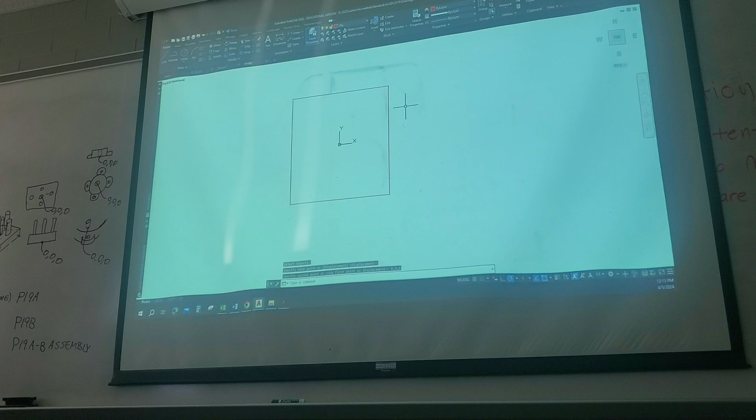So a lot of my 3D drafting, sometimes I start exactly where it needs to be. A lot of times what I do is start drawing, and then at some point I need to adhere to 0, 0 - sometimes it's after I've finished drawing the part that I say okay, this is where I need to position it. So it's up to you how you start out.

Like I said, when you do 3D projects, there's very likely multiple ways of doing it. Alright, so there's the outside of my box, C and space bar. I'm gonna go to 0, 0, 0 with the circle. It has a radius of 0.5.

I'm going to copy it, go straight up. I do not have a dimension there, do I? Let me check that - I don't have a dimension out to those holes, so let me see what I've got on that.

So make note of this - oh, there it was over here on this other page though. So technically it was on there, but alright, going back to it.

I'm going to copy this object straight up 2 5/8, straight to the left, 2 5/8 straight down, straight over.

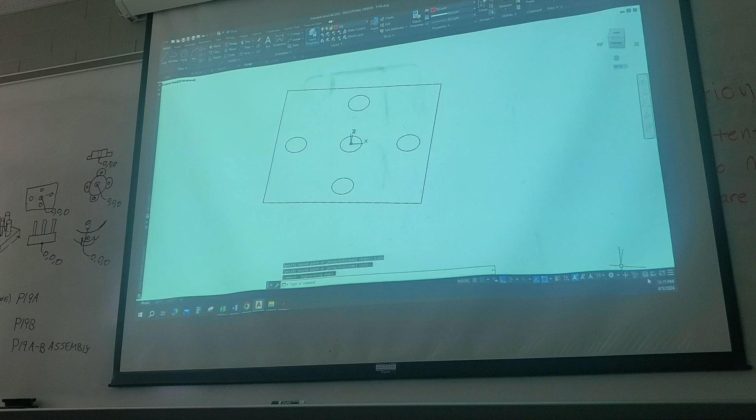And then I can go into my press pull command, which I don't have my 3D ribbon turned on, so I go into my press pull. I tell AutoCAD to - actually I can just do extrude, probably be easier for this part - extrude these cylinders

a height of 2 inches. Extrude this rectangle a height of 0.5.

That didn't work, did it? Alright, let me try it again.

Extrude circles, a height of 2 inches. It's still in 3D. I think extrude just makes it like a shell, because extrude was messing with mine too when I was trying to do last week's assignment.

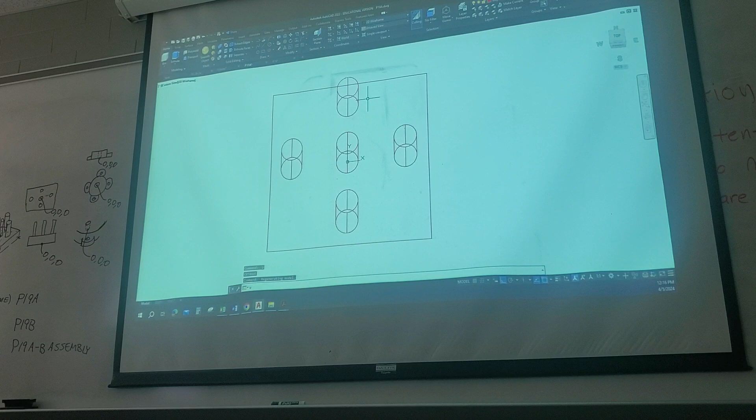You have to join everything. I'm just trying to get back out of it. Alright, there we go. Alright, so now we're back to 2D.

I'm gonna go back to my 3D. Now I think I did too much inside that extrude command, so I'm gonna select the circles. I think it was still in the extrude command when I picked the rectangle.

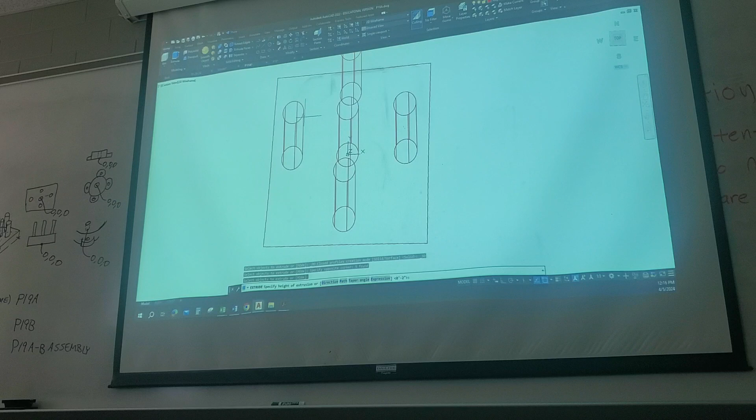I'm gonna tell it to extrude these a height of 2 inches, and then space bar back in, extrude this a height of 0.5. So there that is. The beauty of extrude versus press pull is with extrude, there are no 2D shapes left over. It does incorporate the 2D shape into the final product.

So there is Control S, there's my P19A. I'm gonna go ahead and stay where I'm at, do a P19B. You can see when I erase that one solid, there's nothing left over.

Alright, so there's my 0, 0. For the second one, I'm gonna go circle, 0, 0, center. And that one is, so the small ones are 0.5 radius. Then I've got another one that's at 0, 0, that is 2-inch radius.

I've got these 0.5 ones. I've got one of them straight up, 2 5/8. One of them to the left. If I still had my profile, I could have used it. One of them straight down, and one of them to the right. And then I've got another circle out here on each one of these that is 1-inch radius.

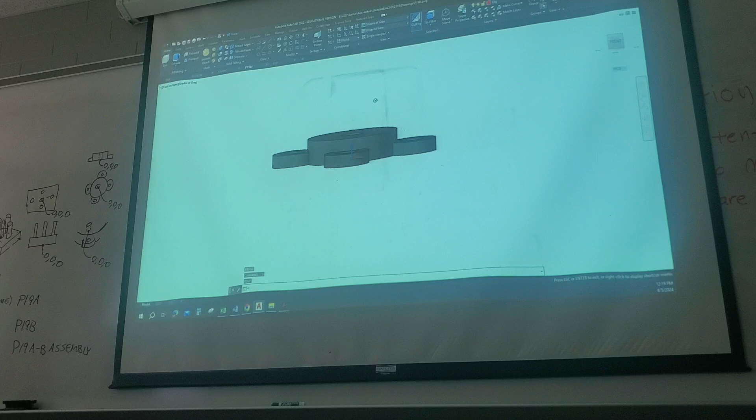Another way I could have done that was to roll that object up, look at it from this position, do a regular window just across the bottom, and then erase those 2D objects that way. So that's my P19B. Any questions about that one?

Like I said, pretty basic 3D shapes, but multiple ways of drawing. You could have drawn both of them with 3D objects, cylinders, and then box on the first one.

So now what I can do is I can go Control-Shift-C, 0, 0, 0 for my base point, this object right here to my clipboard. Now I can go back to P19A, which I just closed down, or did a save as, is this one.

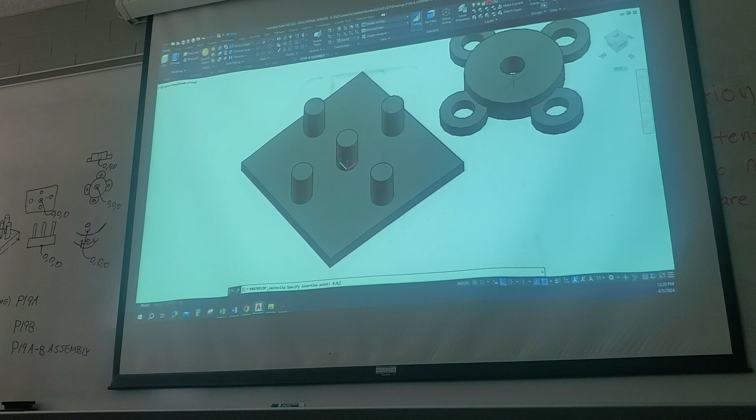I can come over here, do my save as, call it P19A-B assembly. I can do Control V, 0, 0, 0.5 and enter, because I want to move it up half an inch in the Z direction. Now I've got that one sitting on there.

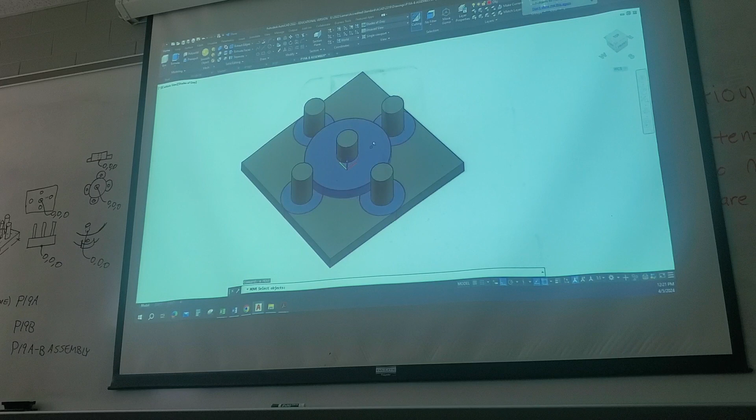Had I just went and said Control Shift V, 0, 0, 0, it would have been down there too low. I could have then went move, selected that object, moved it straight up in the Z direction, 0.5 and enter. Either way, it still needs to be sitting on top of that object, not down into it.

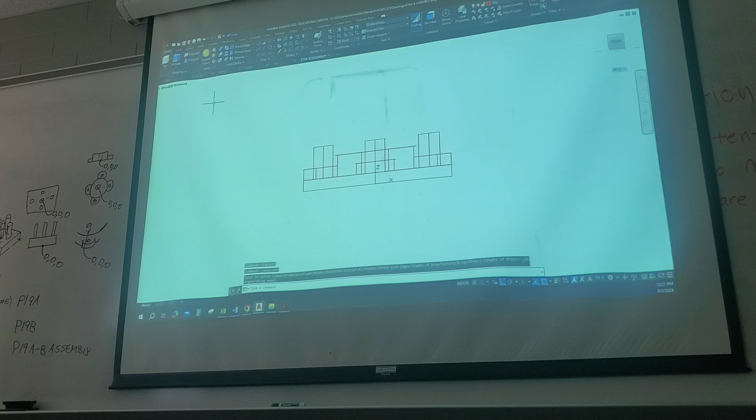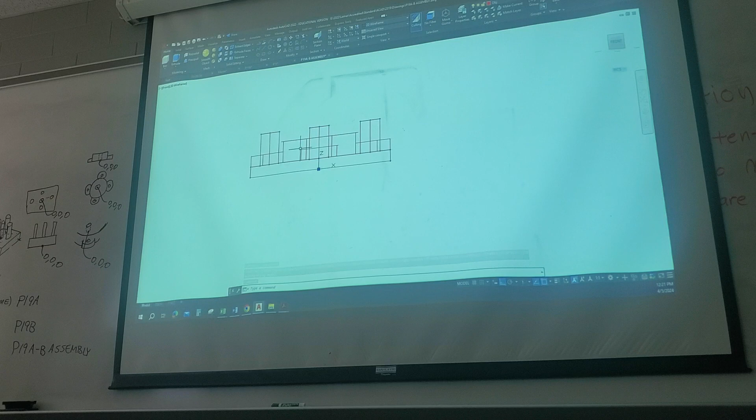So if I go to wireframe, which is how I can go to check that, I can see that that top shape does not go down into that other shape. Any questions on this piece?

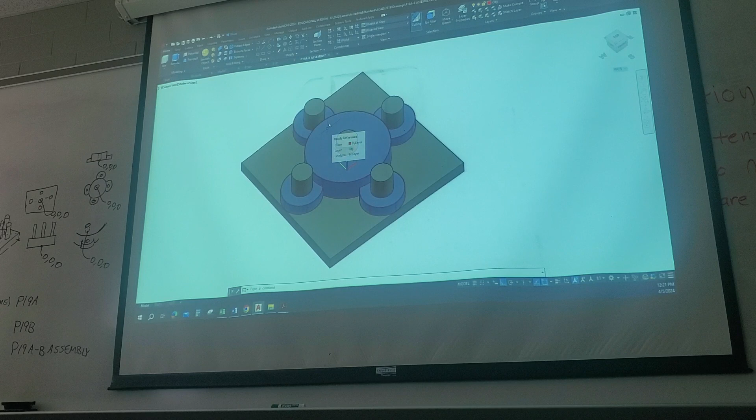Alright, like I said, that's simple, but I want y'all to spend some time playing in 3D. Here is a little visual of your next thing that we're gonna do. So you're not doing it on this project, but I want to show y'all so that you can kind of practice it a little bit.

You're more than welcome to, but remember, all you're turning in on this one is the 3D part. That's all I'm checking on this one. I'm not checking anything 2D. But on your next project that we're gonna do next week, you're gonna have a test next week. I'm gonna give you your next project and give you a little bit of instruction on it, and then you'll start your drawing test.

So what you're gonna do next week on your project, starting next week on your 3D projects, is then turn it into a 2D project. So this assignment would actually get emailed electronically because it's a 3D check, and then you would also have a printed copy. So everybody ready?

Watch to see what I do to take this into a printed version. All right, so whenever we drew this, we took what I gave you that we assumed, or we took that to be the top view, which it was.

So when I come over here on my view cube, remember we always need to have your WCS set right there, your world coordinate system. That is AutoCAD's coordinate system, 0,0 in its real natural position. That's what 0,0,0 you need to be basing your drawing on, with WCS set right there.

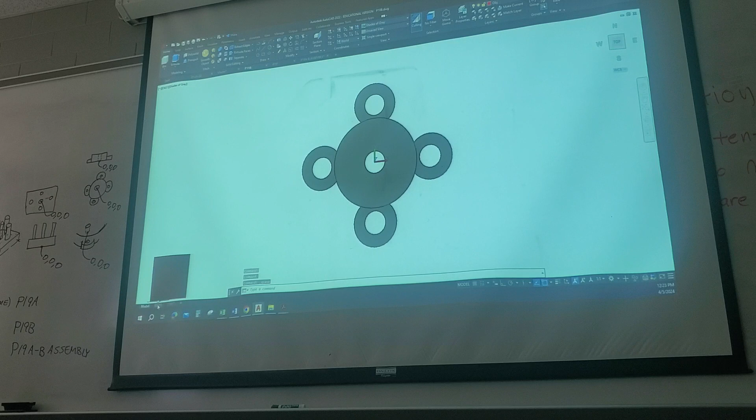I want to do 2 views, and that's it. Now I have 2 views in an ISO. So after I've drawn my part, we're still doing like we did off the sheet before. Control S to save my drawing was my next step. Next step was to select the border and title block, which this one is 8.5 by 11.

Here's where it differs with a 3D project. So what I'm gonna do is I'm going to erase my viewport. Remember that, erase your viewport.

We're no longer looking through that window at something in model space. We're gonna be doing everything that we need to do right here on this page.

You can switch layers if you want to. I usually stay in my main object layer. There are different things that you can set up layer-wise inside the base command.

So what the base command does is it takes that 3D object that you've drawn and shows it in a 2D view. So when I select the base command, it expands. I've got 2 options, from model space, from inventor.

So if you're creating a 2D drawing and you're using Inventor, you can use your AutoCAD and your AutoCAD borders to put that object onto.

So I come down here, I tell AutoCAD from model space, I'm going from AutoCAD's model space is where I'm pulling that 3D object, that 3D shape. So I say from model space, AutoCAD says, okay, this is the object that I found in model space.

The standard view that comes in whenever you click that is going to be your front view. So before I left model space a while ago, I told y'all and showed y'all that based on the view cube, the top view was looking down on it.

So had we went over to our view cube and rolled it up to our view cube said front, this is the view that we would have been looking at of that object.

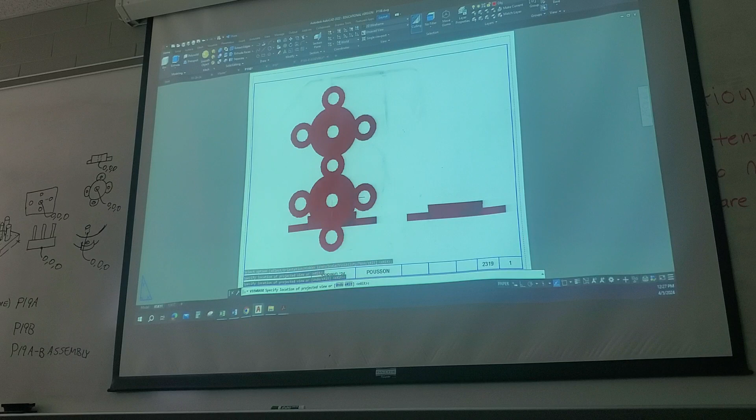So we can do any of our orthographic views just by dragging our cursor in that direction. I can do a bottom view, a top view, right side, left side. I could even spin it around and do a back side, but it would be off in space, I guess. But you can also do isometrics.

So I can bring my cursor up here to the corner where we normally do our isometrics. You can see that that view doesn't change based on my angle over here. It's going to be that isometric in any of these off vertical or horizontal directions, bottom side of it down here, top side of it with these. So I'm gonna pull it over here for this isometric, this ISO right here, and pick that point. That's all the views I want, so I'm gonna go ahead and hit enter to complete my command.

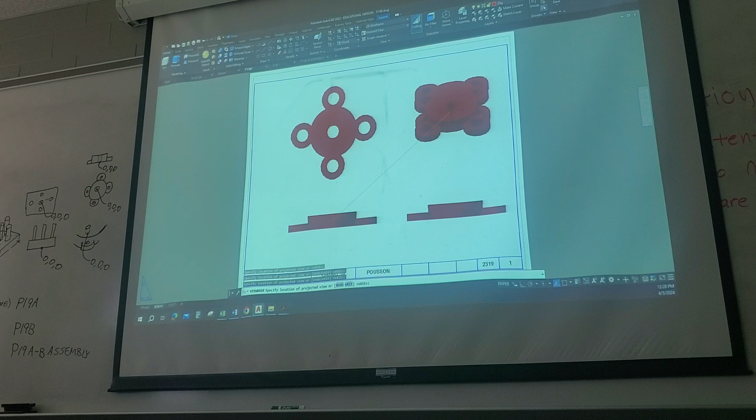There is my 3D object in a 2D format. You can see that these two views look just alike, so I did not need that view. I can erase it very simply, just by clicking on it, picking E and spacebar.

So here's the next thing you're gonna need to do. This view up here, the isometric view, we do not show hidden lines in an ISO view. So you're gonna need to move your cursor up there. You can see that view's lighting up. It is not a 3D object, it's a 2D projection of a 3D object. So if I single click on it, you can see some stuff lights up right here. You can see my ribbon changed. I've now got this drawing view tab because I selected that object that AutoCAD added to my ribbon up here.

What I'm gonna do is pick edit view. You can see my menu changed a little bit again. I'm gonna select right here where it says hidden lines. I'm gonna expand this, and you can see you can click and pick different visual styles to show here. What we want with our isometric view is visible lines only. So when I click visible lines and hit escape, you can see that now that view fits our criteria.

So the next thing I've got to do is put some dimensions on here. Just mimic the dimensions that you see on your page. So I go into my dimension layer. I don't have to worry about, oh, what layer is this in? If you come down here, you can change the layer and scale. We don't have to worry about scale when we do this.

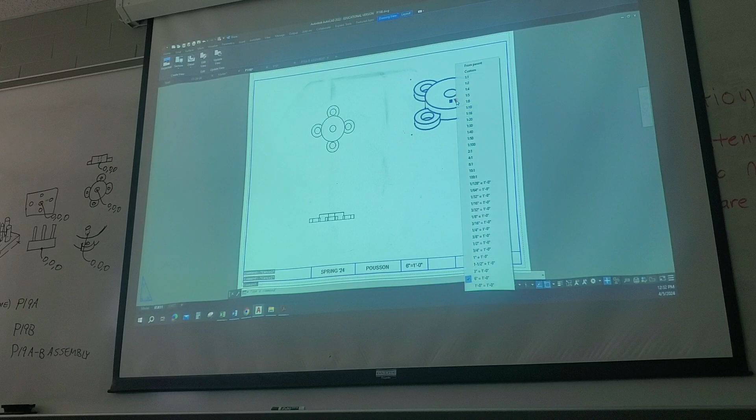Or I can set it back to by parent, and then whatever I do on that main view over there is what scale will drive it. So we said that 6 inches equals a foot is our best scale.

Now to dimension it, I've gone into my dimension layer. I'm gonna zoom in on this view. I go into my annotate tab. I've got my 3D on, my linear dimension. So on my drawing, it shows a dimension from here to here. Didn't have to worry about scaling because there is no viewport.

I've got some diameter dimensions to show. Got a diameter of this shape right here. I need to pull that to the outside, don't forget to do that. I've got a diameter of this guy right here. I already got that, this one right here.

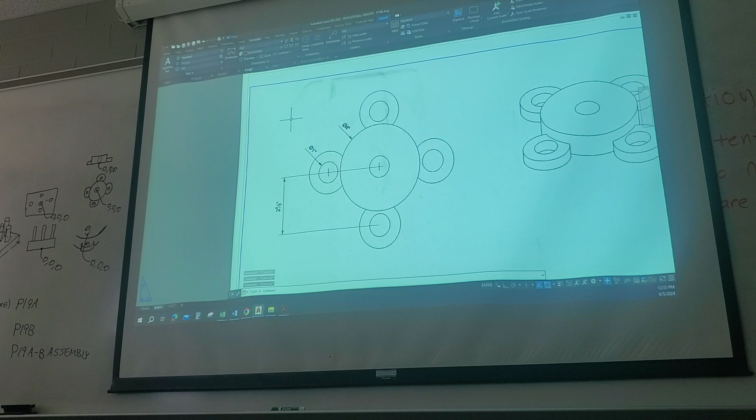Now there is technically a mistake on this, but we're okay with it in this situation. Before I tell y'all what it is, does anybody see anything with the dimensioning on this object? Anything incorrect? I'm gonna go ahead and put this other dimension on there and y'all can look at it and see if y'all see it. But like I said, we're okay with it in this scenario.

Need to add the typical of this.

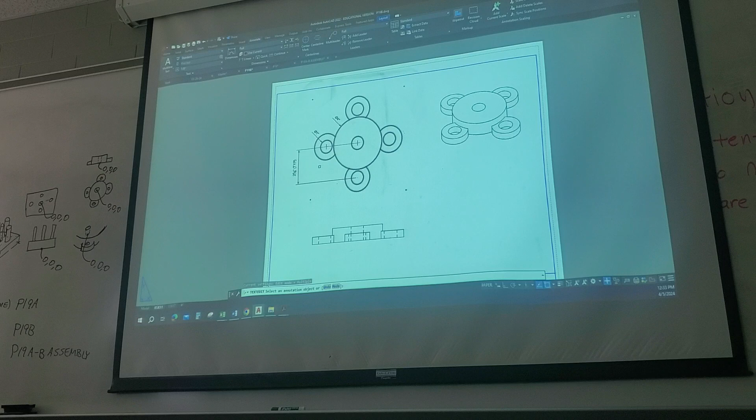Does anybody see what the incorrect dimension is, other than the lowercase letters out there? The incorrect measurement on this, or the incorrect information on this, is that right around in this area, on this outside ring of that small circle right there, they call that out as a 2-inch diameter. Does everybody see that? Mm-hmm.

Technically, that is an arc, not a circle. An arc is dimensioned with a radius. The reason we're okay with it on this is because it was represented and drawn with a diameter shape. There is a full diameter, it just goes up inside that other one right there. So technically we're okay with that being shown as a diameter dimension, but normally with that being an arc, it would have been defined with a radius, not a diameter.

All right, so on those dimensions, you don't have to put all the typicals.

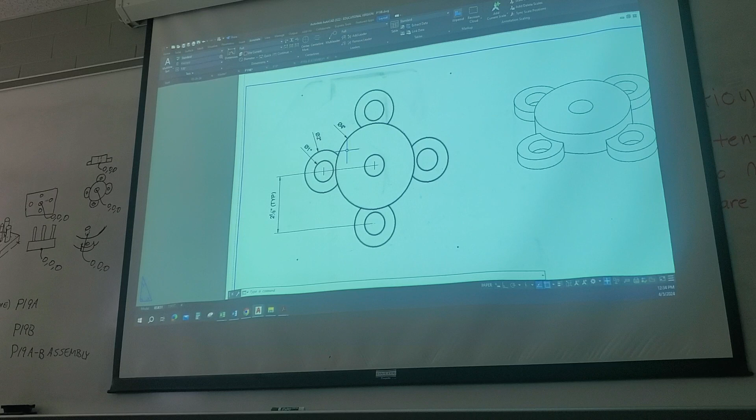Definitely do not put all that 0.5 inch thick stuff. That applies for you to be able to draw it. This is the dimensioning information, and then we're gonna come down in this view because we have to show dimensions in every view. I'm gonna show that thickness dimension down here. So that piece is that bit thick, this piece is this thick.

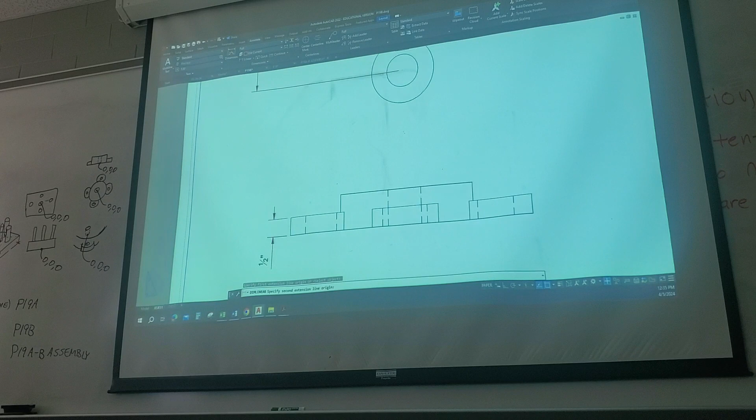See that little yellow box right there? Let me do that dimension again. Whenever I come over here into my dim linear command and AutoCAD says pick a point, if I come down here and pick an end point or some physical point on that 3D shape, AutoCAD's okay with that. If I come over here and pick that node, see that little tooltip that says node? That means it's reading that dimension, not the 3D object, and AutoCAD is going to give you that error. That dimension is not incorrect, but AutoCAD wants you to force that dimension on that object if you have to. Because there's another object snap point there, if I force AutoCAD to use that endpoint of the object, AutoCAD is okay with that.

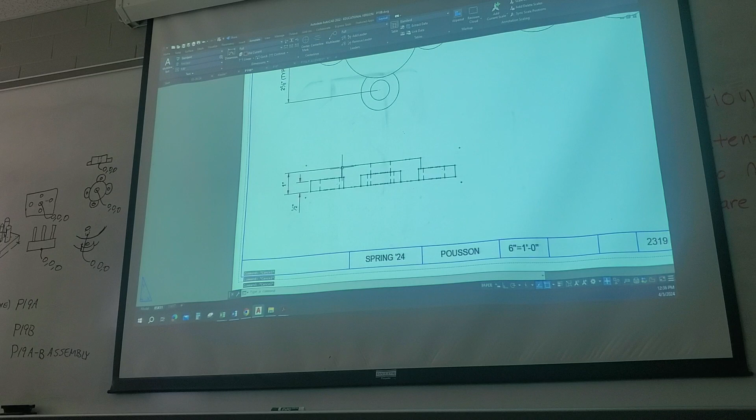The reason that matters is if I go over there in my model space and change that object, as long as it's linked to that object and not just that dimension, it's going to change with it if necessary. AutoCAD wants you to do that because that's how it should be. It doesn't mean your part is incorrect when you see that little yellow thing pop up. It's just a flag telling you that you didn't link that to the object, you linked it to the dimension. So you might accidentally change that measurement and this one not change. That's what AutoCAD is telling you.

So now the only thing we've got left is to label our views. I'm going to come back over here, go to my text command, go into single line text. This is view labels, so I want it to be 5/32 text, 0 angle, this is my top view. I can copy that and edit it if I want to, or type new. We do not have a north arrow on this, therefore we do not have a plan view and elevation views.

So that looks like all the measurements and everything needed to be shown on that one. Any questions about it before I go any further?

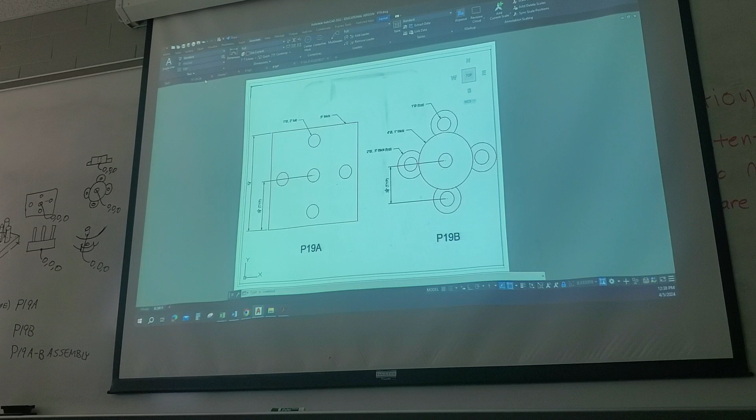Alright, so that is how you would do it. I'm not going to go through the full dimensioning on the other one, but I'm going to show y'all one more time how we would go about doing that. Let me open up my P19A again. So on this part, same process: go to the border and title block you want, erase your viewport, go through to the base command from model space, front view where you want it, hit enter or space bar.

Top view, isometric view. You can see that when I move this over, that other top view automatically moves also, because remember they have to stay aligned. I can move it up or down and not affect that one, but if I move it left or right on that parent view, it changes that one. Then we come up here, edit view, hidden lines, visible lines, hit escape, and then go through with our dimensioning and title block change. That's it.